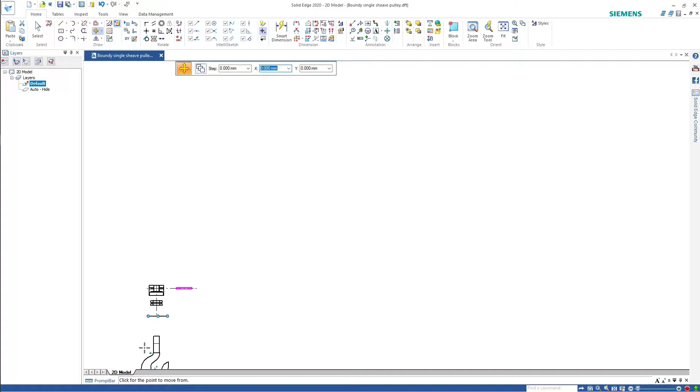Swivel, so turning this into an exploded orthogonal. That's down 20 mil. Copy that from the middle to the middle.

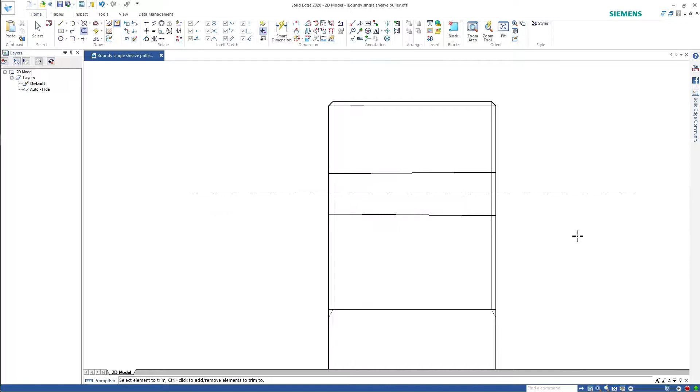There's our crane hook drawn. There's the thrust bearing drawn. There's the nut drawn. Now let's draw in the swivel block.

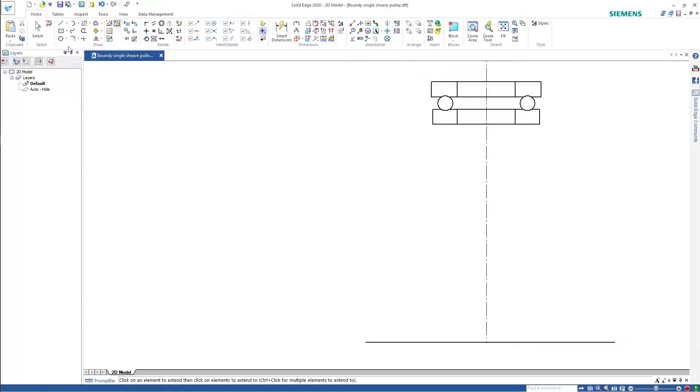The swivel block, let's just draw in the bulk of it first, then later on I'll put threaded ends on. We have got a block that is 99 mil across by 45 high, so I need a rectangle, 99 across by 45 high.

In the middle, of course, I have got diameter 38, so I'm going to just draw in something here that later on I can remove. And right now I'm going to offset that by 19 mil. Same thing, I'll draw it only half of, then I'll mirror image it.

35 out, and 35 and 5 is 40, so I need another 5 mil offset out here. Down here, that is offset by 6 mil to give us that bottom bit. Let's just now cut out the shape that we're looking for.

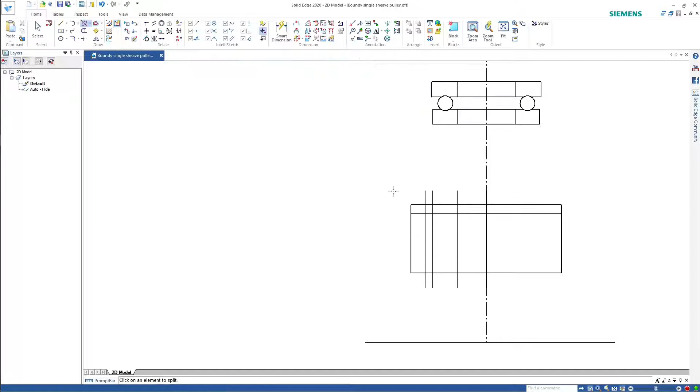I'm going to just check dimensions, because once again what I'm looking at here is not what I'm seeing in the book. 99, that's 80 diameter. Yep, we're right, the drawing in the book isn't.

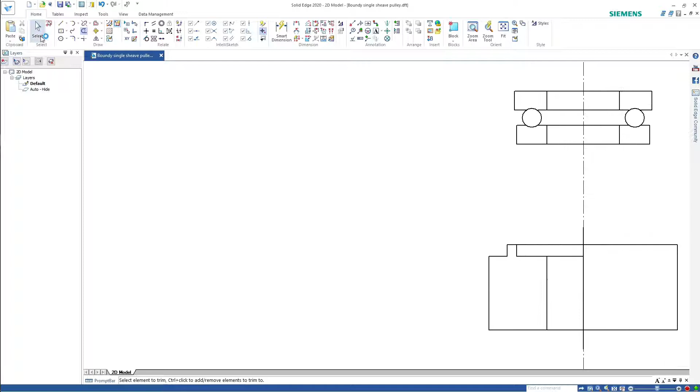Let's just first up remove that and mirror image it. There is the bulk of the swivel block.

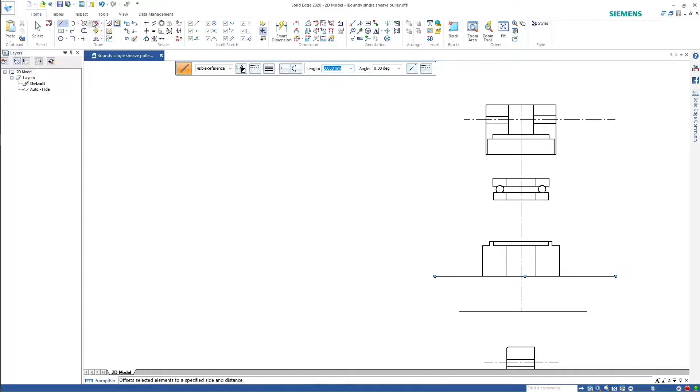Let's now add in the rest. Okay, I need to put in a pin that is 20 mil up off the bottom. So 20 mil up, let's just offset that by 20.

I'm intentionally only drawing the cross section that I'll need for later, and that should be 25 up, which it is. Off that I have got a 14 mil offset, so that is offset by 14 mil, and then it's offset by another 25 to get to the end of the thread.

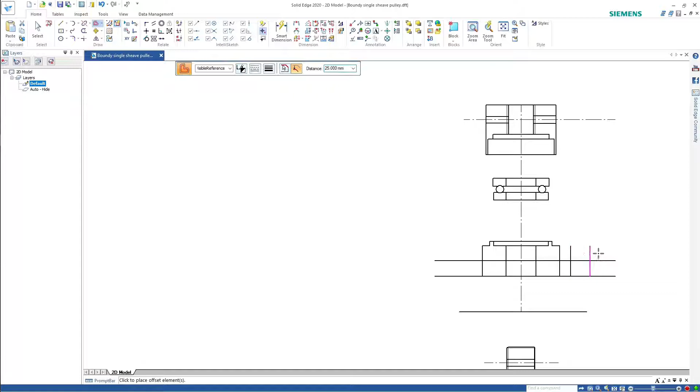So let's just draw that in as a diameter 25 mil thread, or a 25 mil spigot, so don't care about that distance, but that is 25 exactly. Let's just clean out the rest that we don't need.

Thread on that is M20. So that means I'll need to draw in an M20 thread here by 20.

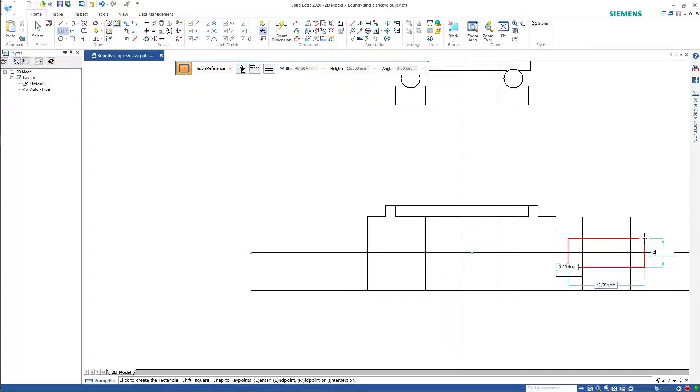Let's just first up make that one and that one meet up. Okay, so there's our M20 thread.

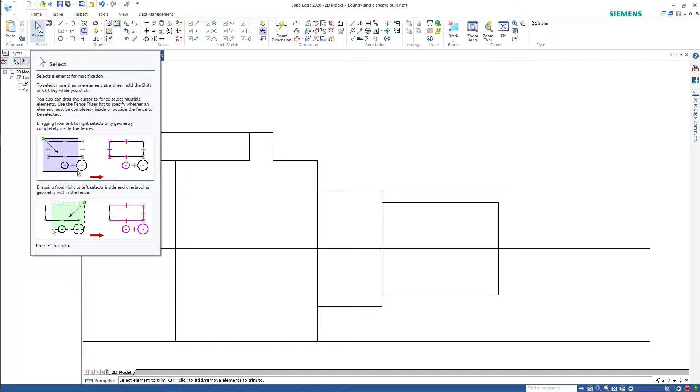Now, of course, this here is an M20 thread. M20 by 2, I'm guessing. Let's ask the interwebs. There you go, thread pitch table. M20 pitch coarse by 2.5.

So I'm going to now select that one, and as a chain, 1.25 mil, half of the 2.5. That looks better. 1, 2, 3.

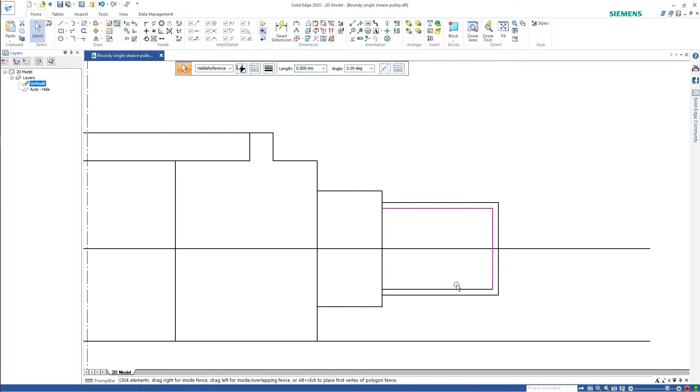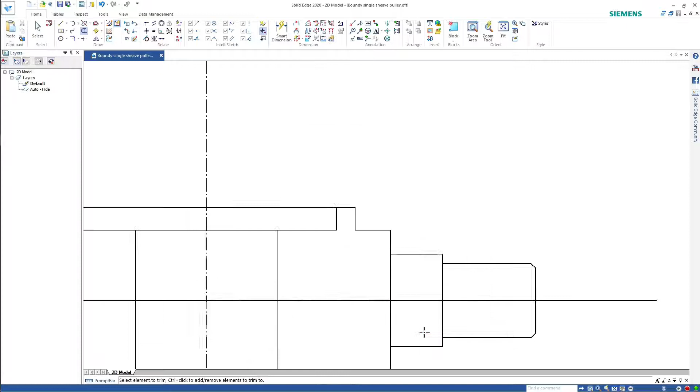Let's get the right line weight, and let's get this done. Extend to next. Then we're going to put that there, put that there. Done. So there is the end of the swivel block, and let me now just select all that and mirror that around the center line.

Mirror that around the center line. There's the other end of it drawn.

So I'm just going back into Solid Edge. I'm just drawing the washer hanging off the swivel block. It's not the world's most clearest image, but he wants a washer 5mm thick, 50 OD, 22 ID.

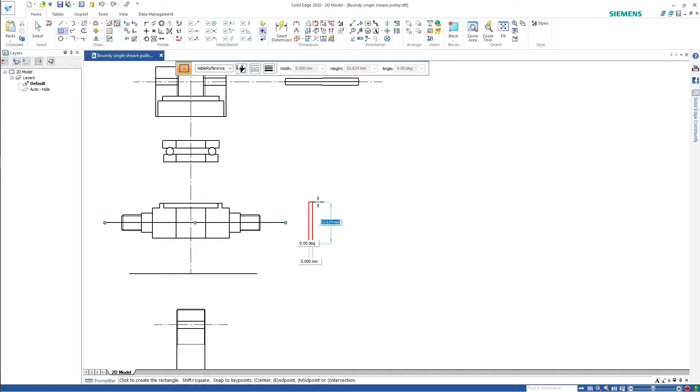So let's just draw it up. A rectangle 5mm thick by 50 OD, and on the inside let's just draw a line across the center line just to give us something to work off. Just draw up another rectangle off the center mark, 22 wide this time.

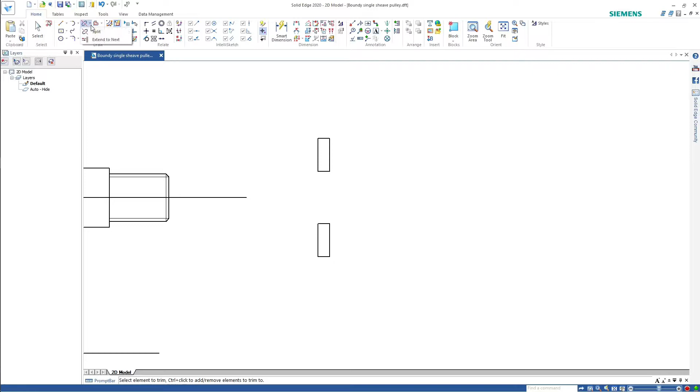5mm by 22, and now you just remove what you don't want. Oops, I did remove something I did want. Done. The nut is just as easy.

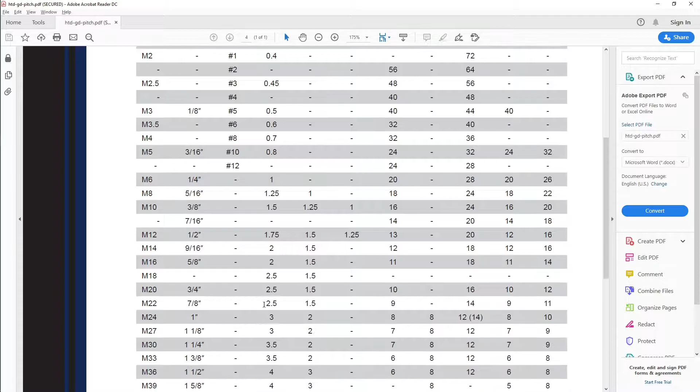If I come in here, M20 standard coarse thread is 2.5, which is what I've drawn that at. The width of the nut is 1.8D, which is 1.8 times 20 is 36 millimeters.

Thickness of the nut is 0.8D. If it was a bolt head, it doesn't need to hold as much weight, so it's 0.7. The nut is 0.8, so 0.8 times 20 is 16 millimeters.

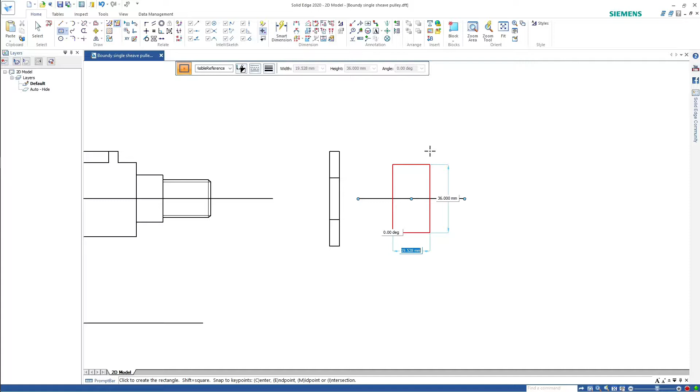So let's just offset that by 0.45D one way. 0.45 times 20 is 9 millimeters up and 9 millimeters down. That actually meets Australian standard for the nut.

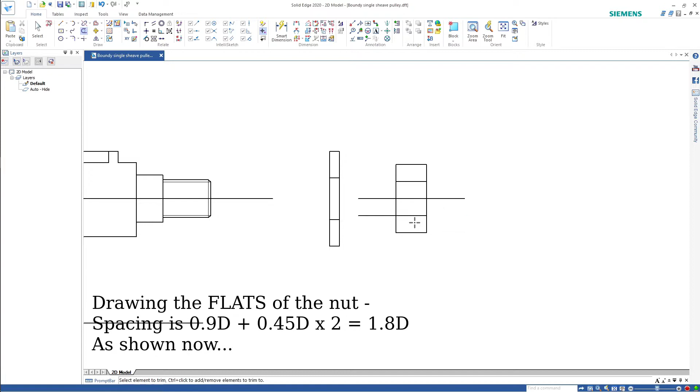I'll turn that into a center line. And let me just reflect those on the other side, check it says copy, which it does, and done.

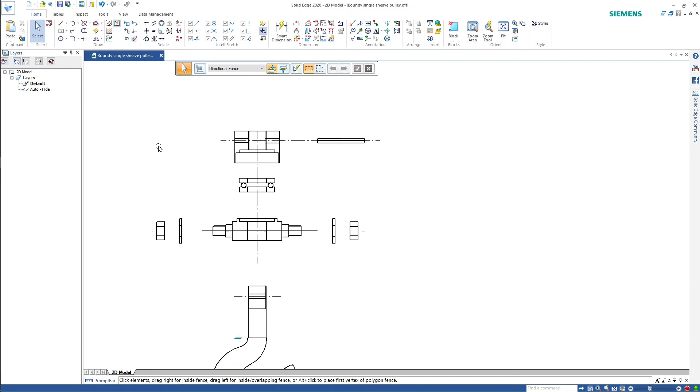So there's our exploded orthogonal of the crane hook and the hook assembly. All that's missing is the cheek plate and the sheave pin. Let's keep on going up here now.